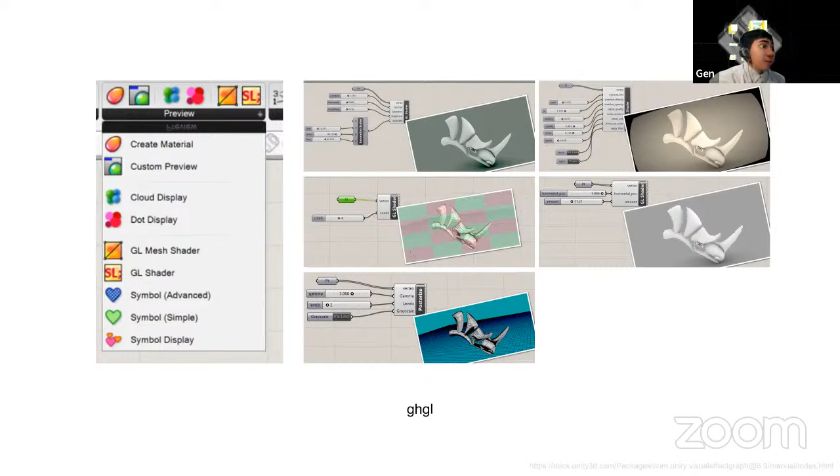You can install that via the Rhino package manager. Today we'll be mainly introducing some of the basic functionalities of GHGL and how you can use this to visualize your output from the 3D GAN.

This is one of the sample effects - you can do some cool color gradients on your NURBS or your mesh in Rhino. I think Behnavi has already posted this into the chat. You have to install these dependencies in order to make everything work.

The first one is a mesh processing library called Chromodoris. The second one is GHGL itself. GHGL can only be installed via the package manager in Rhino. That's how you can set up the environment for shaders in Rhino Grasshopper.

But before we dive into the details of the shaders - so far, does anyone have any questions regarding the existing content?

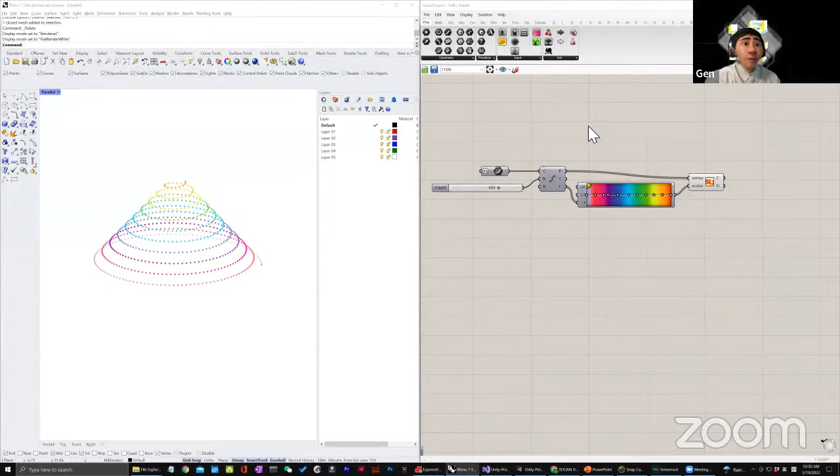After you export the OBJ, the PLY files, we are done with all this Colab part. You don't need to mess with the Colab anymore. Then we can import the PLY files from the Colab export into Grasshopper.

But before we begin to handle the point cloud part, we can take a simple look at how the Grasshopper shader language works. Can everyone see the screen share of the Rhino now? Yes, we can see Rhino.

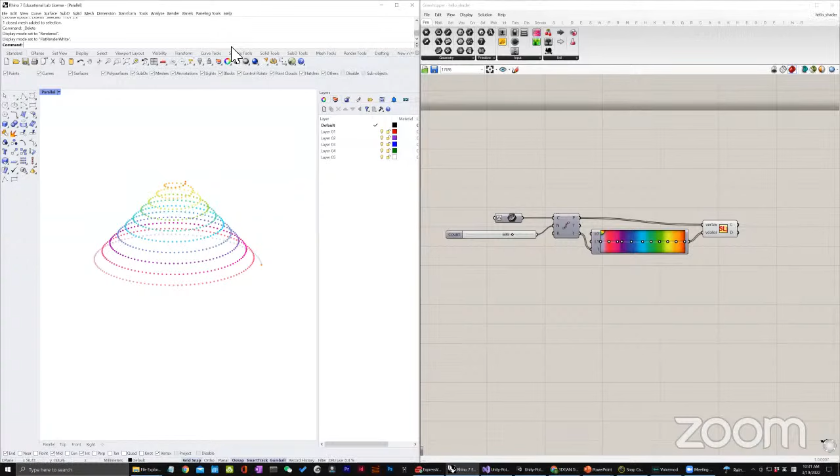So just a quick demo for how you can install GHGL. You just type into the package manager inside your Rhino command line, then type GHGL into the package manager, and it should be there. Just install the latest version. You have to restart Rhino if it's the first time installing the GHGL package.

Rhino provides some quick starter files for GHGL. I posted it here in case you want to learn more about that in the future. We'll go over some of the files together to see how that works.

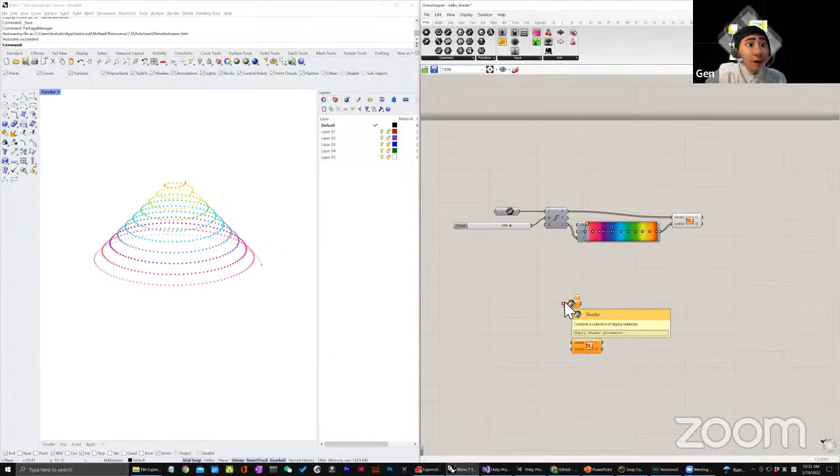Basically, what GHGL is: after you install the program, you can just type in 'shader' inside your Grasshopper command, and you'll see a couple of new elements popping up, including the shader. This is basically the shader object that Grasshopper wraps around, and also this is a GL shader, which renders the points for your Grasshopper program.

What we mainly use more is the GL mesh shader, which is actually what you use to render your mesh. Using this GL shader version, you can also use that to render some of the points in Grasshopper. For example, this one is basically subdividing a spiral curve, and it takes multiple inputs, and you can configure the input ports as much as you like.

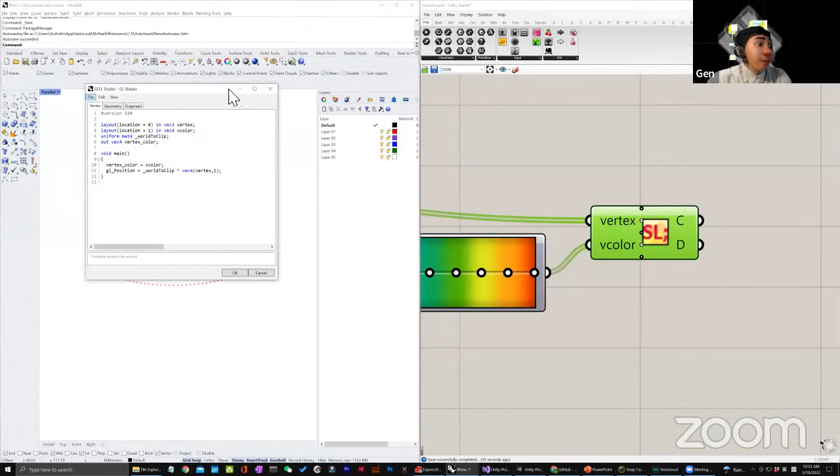So for this one, it's basically very simple. If you double click on the GL shader component, it will pop up a window, and you can see all these sub-shader programs inside the shader.

The Vertex shader is basically just projecting your vertex from the world space to the screen space. There's complicated math behind it, but basically what it does is multiply a world-to-clip MVP matrix to your vec3. Vec3 is transformed into vec4 because it's a homogeneous space - you have to be in homogeneous space to do a homogeneous transformation.

So it's basically appending a one after the vec3 of the vertex, and then multiplying by the 4x4 world-to-clip matrix. Then everything is transformed from the 3D space into the 2D, or the screen space.

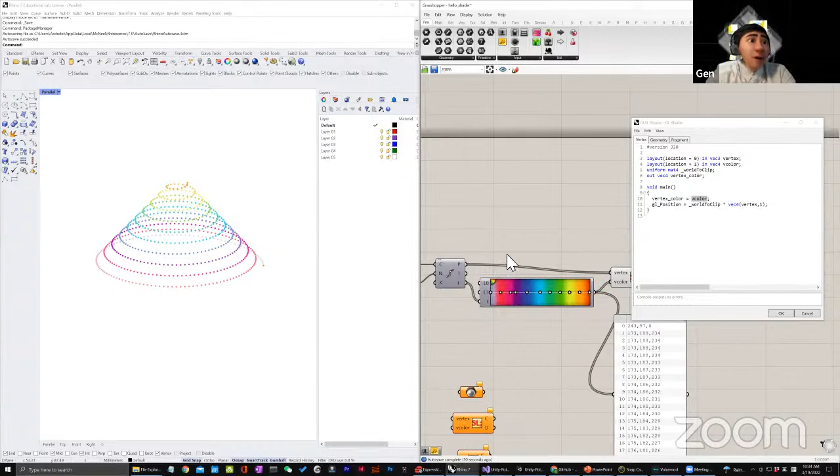Once you have that, you can use the vertex color to render whichever points are inside the screen. We are passing in a sequence - it's using the t value to sample the color from these gradient components. So for example, if you have 700 points, then we're going to also sample 700 vertex colors from these gradients. Each vertex color is passed in as what is called a uniform.

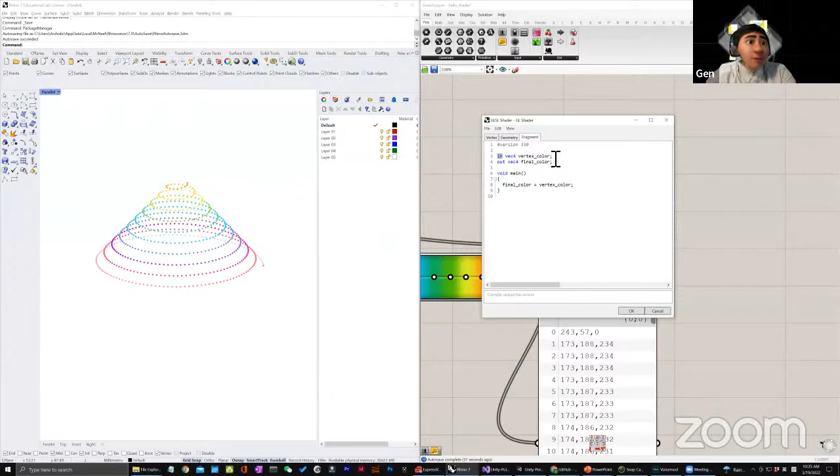As you can see here, Grasshopper uses this syntax to take in the uniform variables.

For this one, this GHGL shader is slightly different from the mesh shader, but what it does is basically the same - just rendering the points. Then we're going to move over to see some of the other examples of more complicated versions of the GL shader. Like for example, this one is still a GL shader.

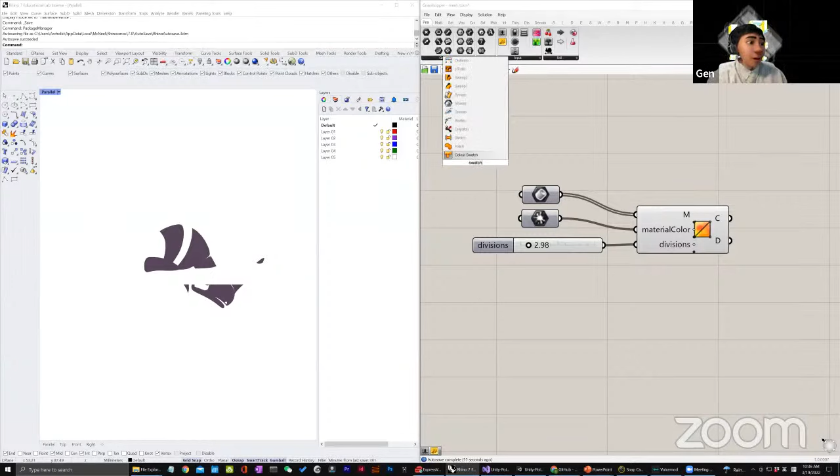This one is a mesh shader. As you can see here, we can use the swatch to give the mesh whichever color you want to pass into the mesh. For example, if you want to pass in different colors, you can select from the swatch.

This is more of a standard GL mesh shader program. So you have what is called a mesh vertex attribute, passed from the layout statement in the shader program. And you also have these uniform values which you pass in to render your mesh - for example, the material color.

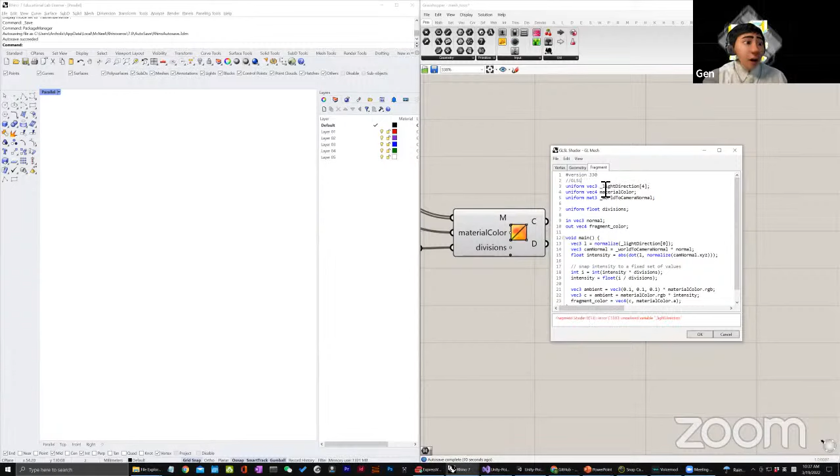All of this syntax language is called GLSL - OpenGL Shading Language. It's very similar to C if you have programmed C before. This should be the double slash for comments. This is the GLSL language that most shading programs use, and it always follows a certain pattern.

Don't be scared by this - it's usually actually very simple sometimes. It usually starts with the version declaration, which tells you which version of OpenGL you want to use. You do not need to change this in Rhino - it's mostly already defined by Rhino. It's like the minimal OpenGL version that can function correctly in Rhino.

Then here comes what we call vertex attributes. Let's look at the vertex here - vertex attributes are mostly what you pass into the vertex shader programs. So let's say, for example, this mesh vertex is actually the XYZ value of your mesh vertex, and the mesh normal is the normal vector of your mesh.

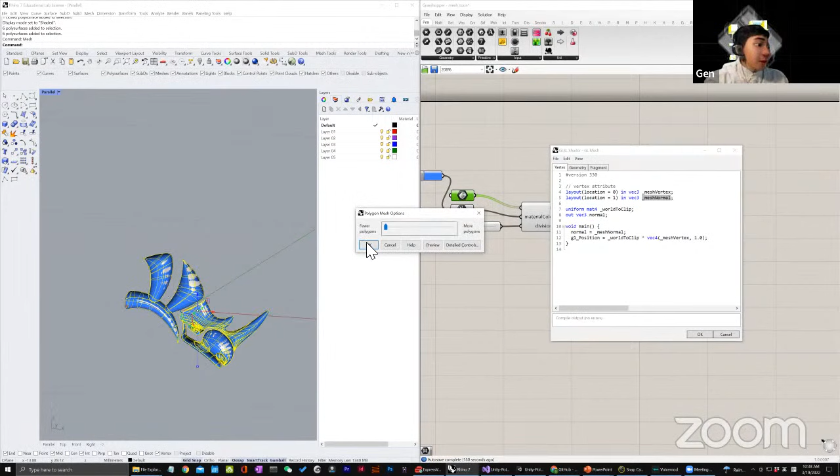If I bake this geometry, you can see this one is rendered as a NURBS, right? Here in Rhino as a NURBS. But what actually really renders it is actually mesh. So let's say we can simply transform that into a mesh by calling this mesh function.

Let me hide this NURBS geometry. You can see the NURBS is actually rendered in the format of a mesh. Each of the points is actually part of the vertex, like the mesh vertex inside this one. In this case, it's each of these particular points in your Rhino geometry, and this mesh vertex is basically the vertex XYZ value for this particular point.

And mesh normal is what is getting computed as a normal vector of the surface at this particular point. So each of your mesh faces have a normal, which is basically the vector that is perpendicular to your mesh face.

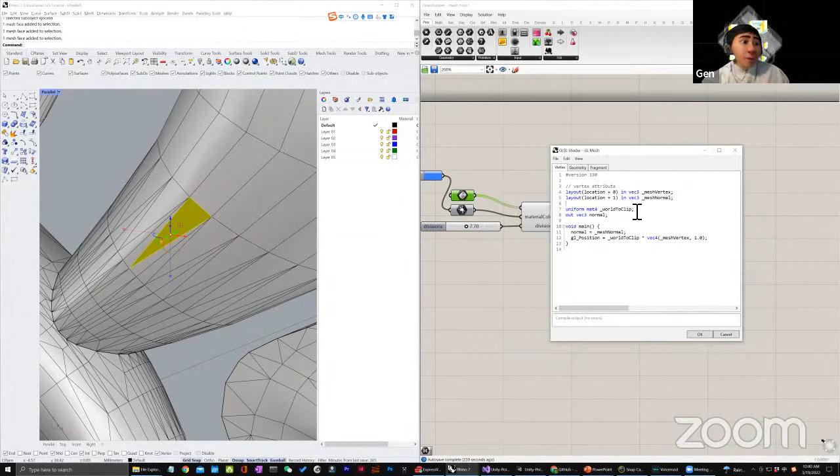With these two values, we can do a lot of fun stuff. For example, we can send the normal further to the fragment shader and play with the normal. And for the mesh vertex position attribute, we can use that, as mentioned before, to project this vector 3 into the 2D screen. Using the GL position, we can calculate...

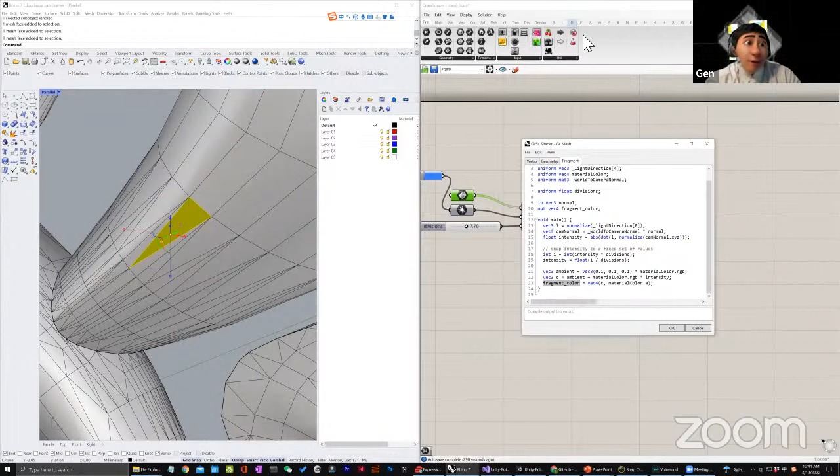the UV, sometimes if you are sampling the color from a 2D texture. But in this case, it's pretty straightforward — it's doing some intensity calculation depending on the light and camera position. Eventually, what it does is pass this, creating this vec4 for the fragment color. So fragment color is what finally tells you which color to put for each face on your screen.

We can also omit all of these parts. Let's do some experiments by omitting all these parts, and you can directly pass in the material RGB into your program. We'll comment it this way, and pass it to the arguments of the fragment color. Let's say we pass in... it actually itself is a vec4, so you do not need to worry about that.

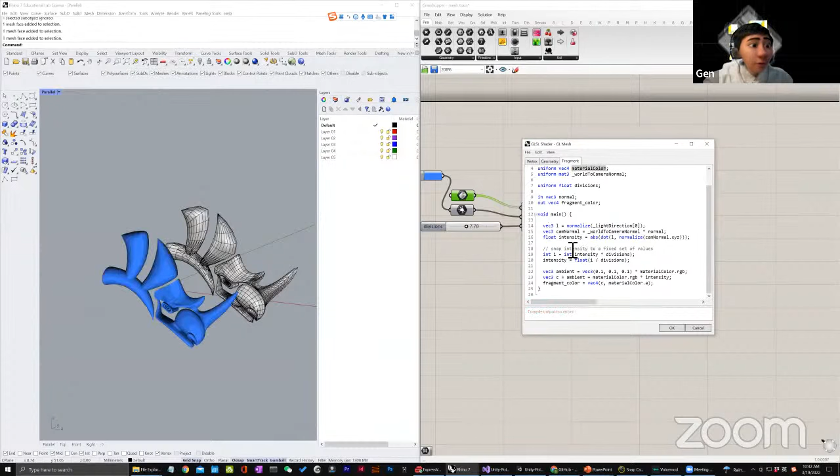I think the material color is here — we have this vec4, and we comment out all of these so we have the material color directly as our output vector.

So as you can see now, whichever color we put here will be rendered on the screen. That's the simplest fragment shader you can create — it's basically giving your mesh a certain color based on your input. And the color here in Rhino is represented as a 4 vector, vec4, meaning a four-part vector that represents an RGBA channel of your color.

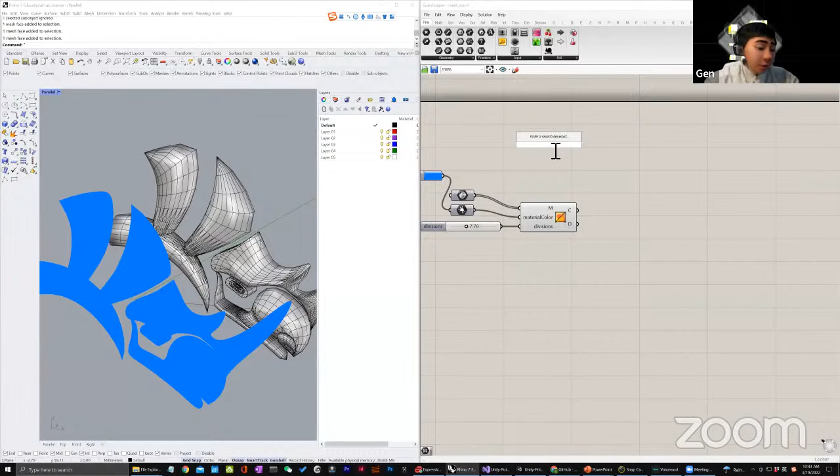So let's say, for example, the color is 0, 120, 225, and 225. The vec4 is basically the same as a vec4 color composed of your RGBA value. That's the very fundamental concept of the first Rhino GHGL shader program that you can write.

A quick note is that everything that happens inside the shader is inside the main function. It's the same in the vertex and fragment shader — whichever code you put, it's going to finally be rendered inside the main function.

The uniform is what we pass in here on this interface as some of the external variables. There are also some built-in uniforms that you can get from Rhino, for example the light direction, and the world-to-camera normal which is basically used to calculate bump maps. You can find all of these built-in uniforms from here. Also, frame size is the width and height of your current screen.

The built-in attributes are what you pass in as the vertex attributes from your Rhino program. Rhino only gives us four attributes, and the mesh vertex is the position of your mesh, which will be used most. Mesh normal is the normal vector of your mesh face. Texture coordinates is what we call UV, used to sample from a 2D image. And mesh vertex color is the built-in vertex color for your mesh from Rhino — if you draw your mesh with some color in Rhino, you can access the vertex color from here.

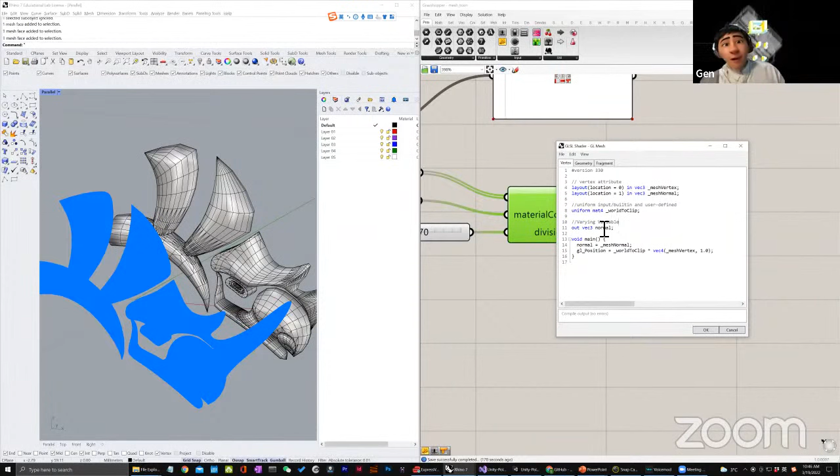This is usually called a varying variable in the GLSL shading language. You can understand that you can pass in something from vertex attributes to fragment attributes, for example, the mesh normal that we usually use.

And we can take a further look at the original example. It's nothing special, but taking the light direction and the camera position to make your rendering more fidelity, higher fidelity. Okay, so that's the mesh normal example provided by Rhino.

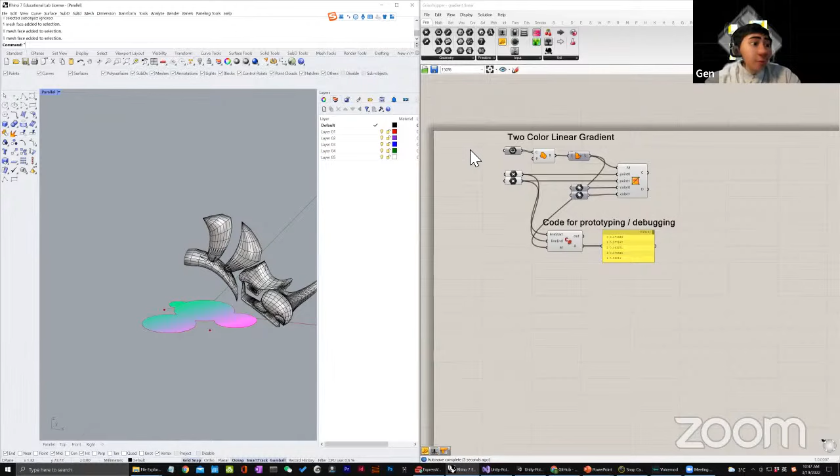Based on that, we can probably have some more fun stuff to play around with. For example, this one. I think instead of using the existing example, we can also customize our own meshes.

Yep, here's another point. This example basically shows you the example of gradients. So that shows you how powerful our shader is, that allows you to do a lot of interesting visualizations.

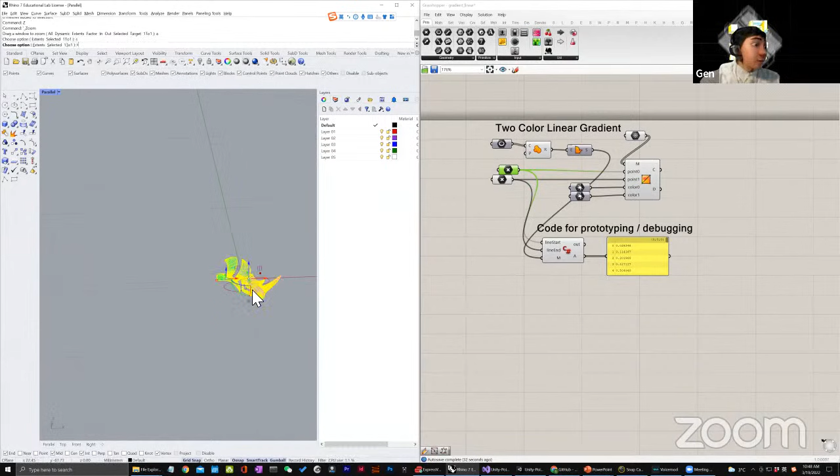For example, what if I want to render our mesh based on the vertex proximity to some 3D point in the Rhino workspace? This is how you do that, and you can see this changing in real time.

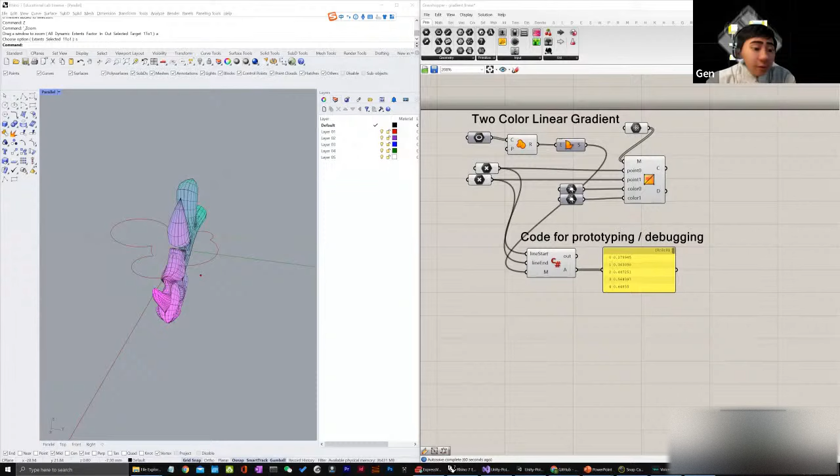So first of all, if you recall from the previous one, we didn't have the uniforms that you can customize on your shader program, like point 0, point 1, color 0, color 1, especially what you use for the shader program. You can pass in all those points and colors from the uniforms.

Like if you want 2 points as the point you want to determine which vertex should be rendered, this is where you're passing the 2 points as the uniform in the form of a vector3. And you can also pass in the color for each of the points that each vertex is closest to, in the form of a vector4.

And in this case, we can compute a value for each of the vertices, like their distance to the points. This is computed by basically creating a line between these 2 points and projecting this vertex onto the straight line. Depending on the parameter between the 2 points, it will give a value between 0 and 1 to determine which color this vertex should be rendered.

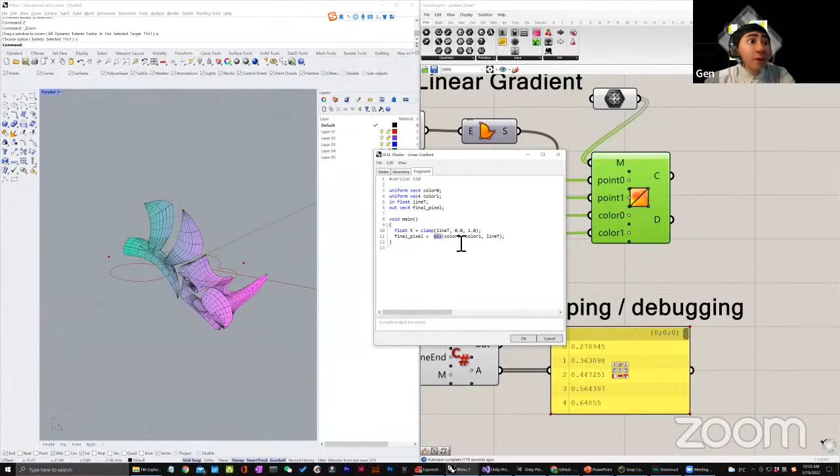So basically we pass a float called 'lineT' to the fragment shader to determine the color that we want to render for each vertex. Here we use a mix function to mix between 2 different colors in this GLSL program.

I think there was a question: if we make the mesh a bit higher resolution, does it affect things, and how do you go about the code? Does it compute within the same time?

You mean like a high resolution mesh? Yeah, so if you increase the resolution of this current mesh, is it a better result? How does it affect the result?

I think the resolution of the mesh shouldn't impact the result so much. It's basically what is processed on your GPU, so it's pretty efficient if you're asking about this in terms of performance.

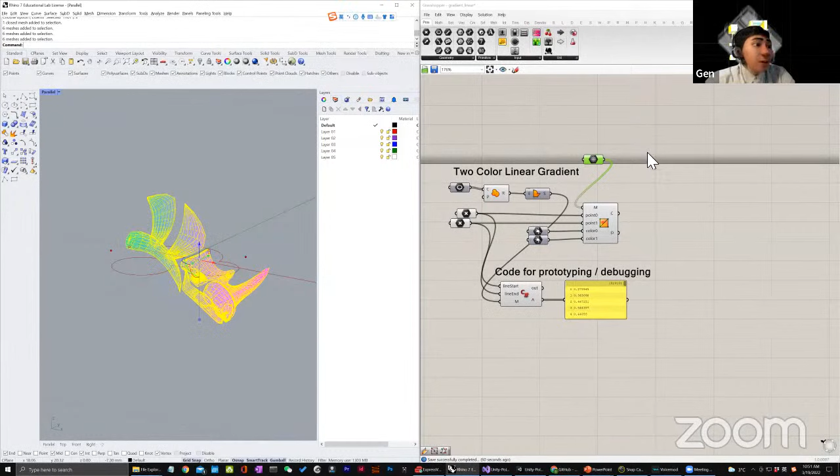Yeah, you can actually subdivide your mesh using some tools. I'm not sure whether I have installed Weaverbird here, but I think I have the Weaverbird subdivide. Haven't used this for a long time, but you can use the subdivide function in Weaverbird to test. If you further subdivide the mesh, it should be fine as well.

Okay, so now let's create a new document and we can start experimenting with rendering our 3D scanned objects using this GLSL shading language. We're gonna start from a simple Python script to customize our file import. Yeah, this should be very intuitive.

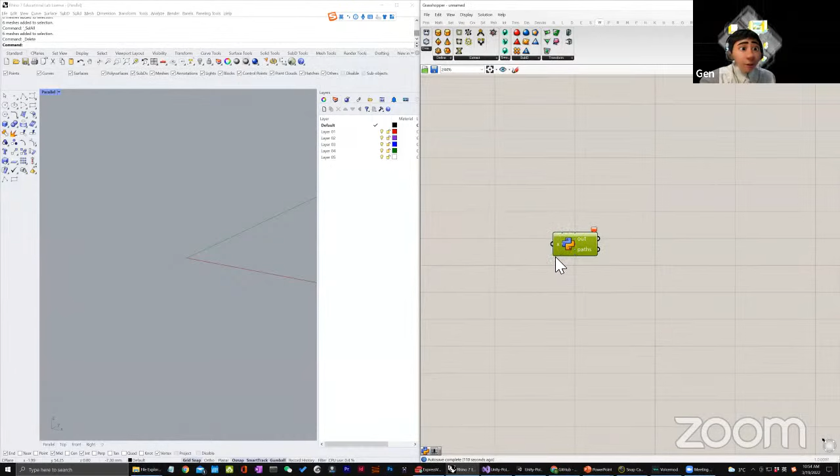We can change this variable name to path, and we keep that type hint of string. Now we do not yet have a path here, there's nothing here, but this path is basically where you store your 3D objects.

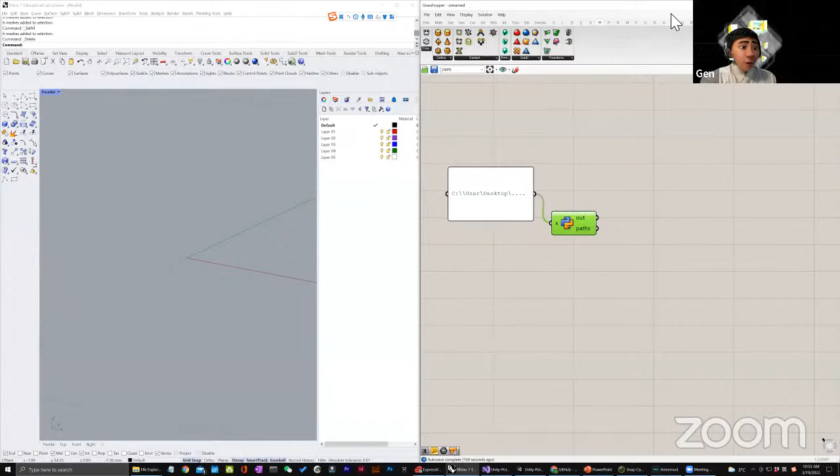So let's say, for example, if I store that onto somewhere like C, some user's desktop or stuff like that, then you just use the panel to add this repository here, and you can run this pretty fast. I'll be typing my file locally. You can do that by copying and pasting this directory from your file explorer.

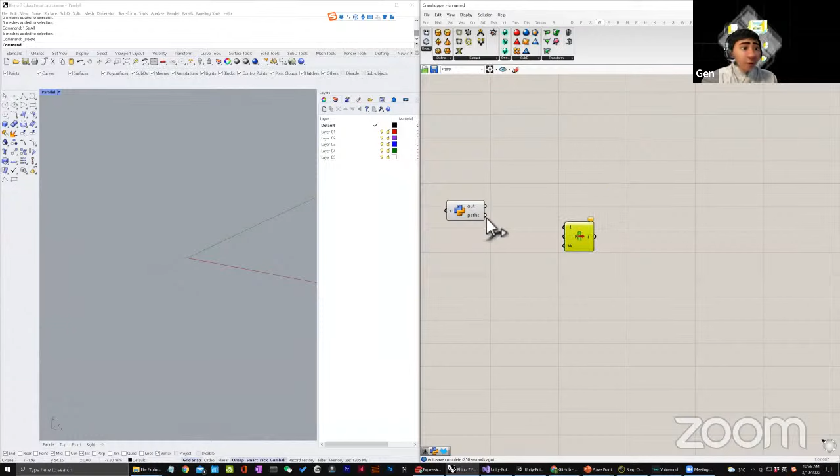Then we'll be reading some of the files using the list items. We're gonna retrieve them by using a number, for example, retrieve the 20th element of that, and then we're gonna create another C# script to read the ASCII file that we downloaded from Colab.

As you can see here, our PLY file is nothing special, just simple text. This is one of the PLY files that I got from my 3D GAN generation. The ASCII format PLY file, if you open it with a code editor such as VS Code or Visual Studio, you're gonna see all this kind of stuff.

It begins with PLY and format ASCII, and you're also gonna have a count of how many vertices you have for your PLY file. Since I can only have XYZ values, it will show property float X, float Y, float Z. That's basically the header part of your PLY file. What we do with our C# script is basically parse all these XYZ values from the PLY file, and then transform that into 3D points.

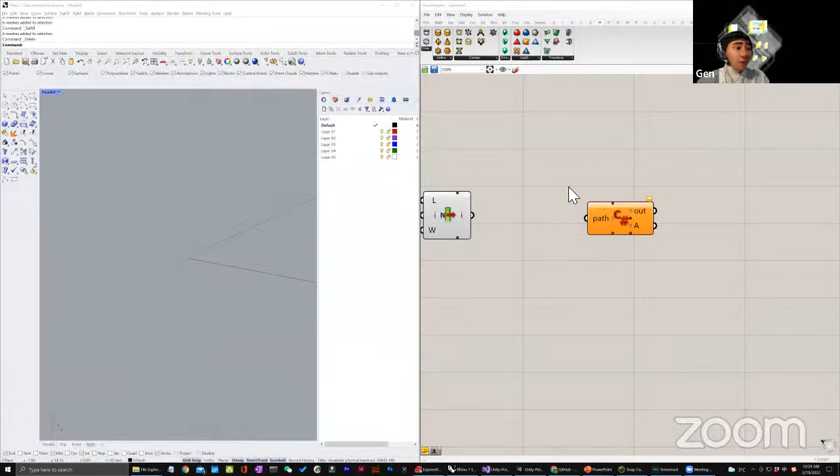Let's go back to the Rhino part. Once you have the path, you can read that from the C# script, and you can parse that into 3D points. So we're gonna just leave it called A.

We're gonna use system.io to read all the files, using system.io.stream reader to read from the file. This is not existing in the default API. This is how you create a stream reader using the C# system file built-in class. Okay, it's running correctly.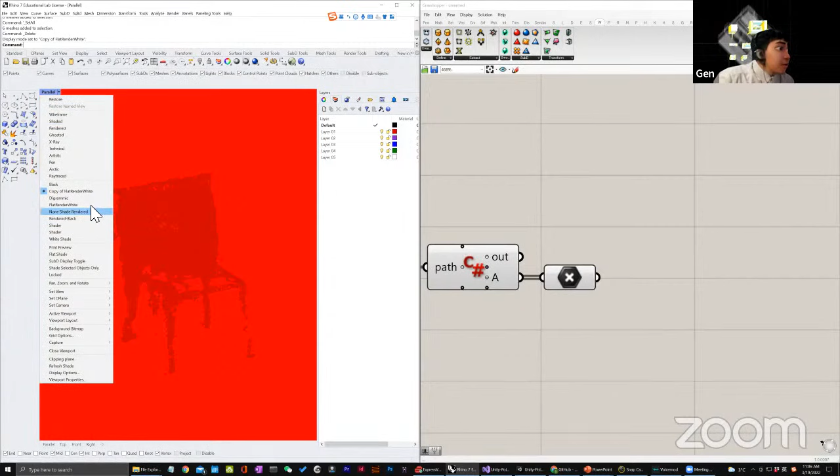All right, let's see how that looks in the white background render mode. Nothing, okay. Yeah, you can also do some fun stuff here by assigning random color using the point visualization as well. But we're not going to do that because we're going to mainly focus on how we interpolate it into a mesh.

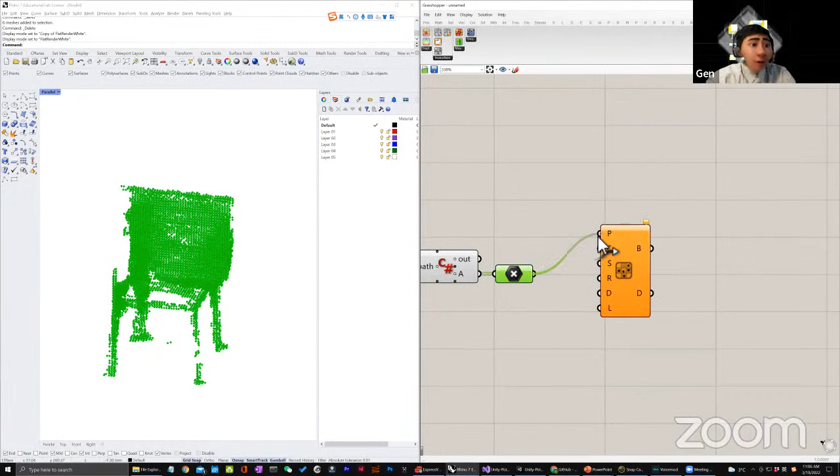So here is where we're going to use the Chromodoris library. Now as you can see, it's basically a bunch of points, right? How are you going to turn that into a mesh? We're going to use this magical component inside Chromodoris called build ISO surface.

Yep, so sorry. We're gonna build voxel samples from these tiny points that we have already got. You have to input the voxel size, I think, and also the effective range, which is the required argument. This one is just heuristic, I used 10 to 15 something. Basically it generates a voxel box for your input points.

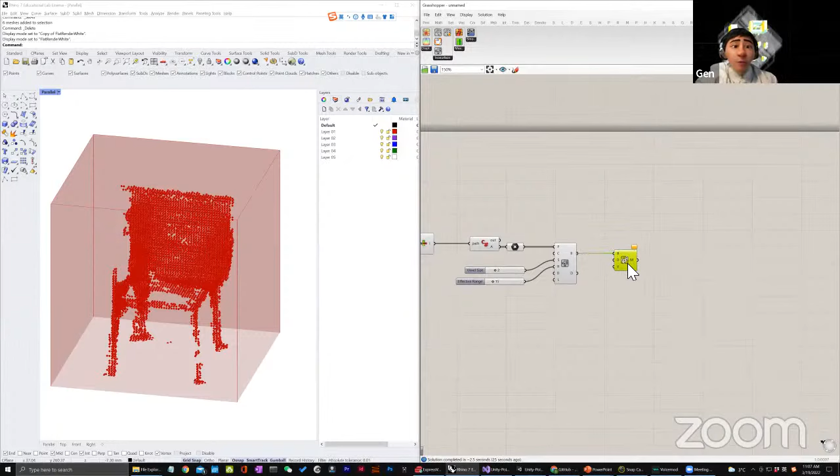And what's actually doing the magic here is this one. It's sampling the ISO surface. It calculates the ISO surface from the voxel data XYZ and a box. You can understand that as sort of like a marching cube algorithm that computes the mesh value for your given point inputs.

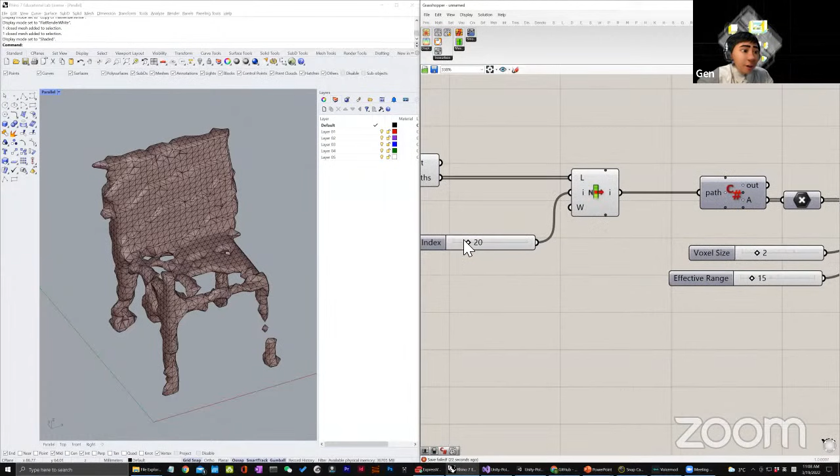Great, now that we have a mesh here. See what we got? Yep, you have a mesh that is composed of all triangles. And then we're gonna, if you change the index here... oops, I'll be careful about this one, it's kind of expensive I think.

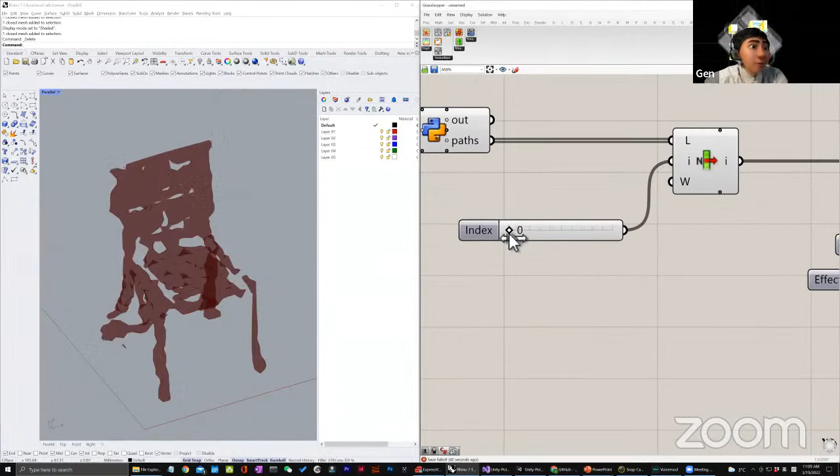Yeah, then you can see that the mesh is changing smoothly as you slide through different values. This is basically what we call a 3D latent model in real time, right? You slide the sliders and you get different mesh shapes here.

And now we're going to further do some visualization of our mesh objects. So one simple quick technique we can use is to create a bounding box for this one and rotate the mesh around some certain angles. I'm going to rotate that with respect to the bounding box, to the center.

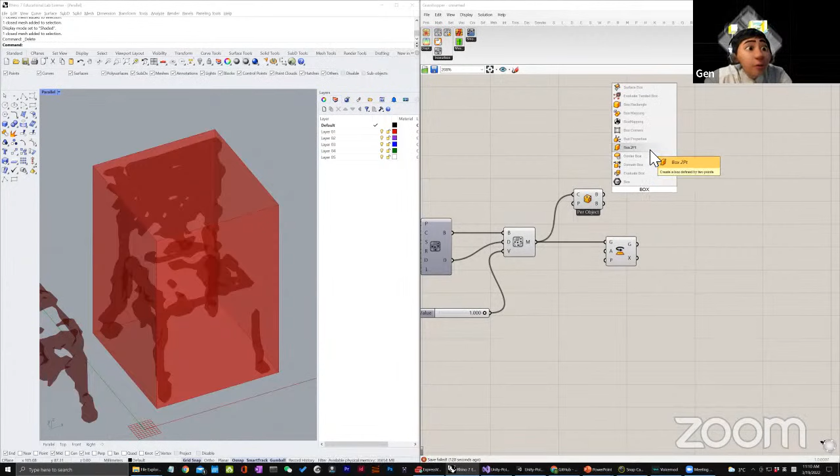I think it should be the box property instead. Here we go. I'm gonna rotate that around the center of the bounding box by giving it a rotate angle of 1 radians, because this one takes in radians. Okay, we're gonna... from the rest of them. Then you can have a rotating chair here in Grasshopper.

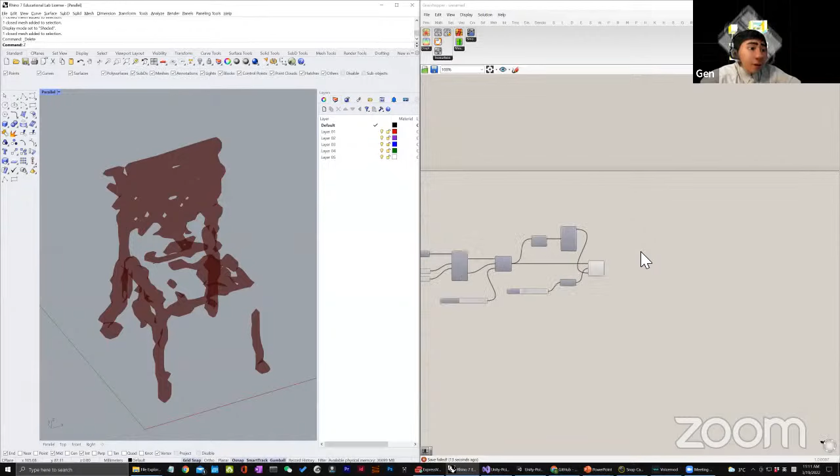Okay, yeah, this is just a very simple visualization. And then we're gonna do some real stuff. We're gonna write a GL mesh shader program for a mesh. But now you can see that there's actually nothing on the screen because the default mesh shader doesn't really have anything.

It's basically giving a random diffuse color, in this case 10011. Yeah, I think we can slightly play with this. It's very dark, right? Like we can slightly play with this one to further some visualization.

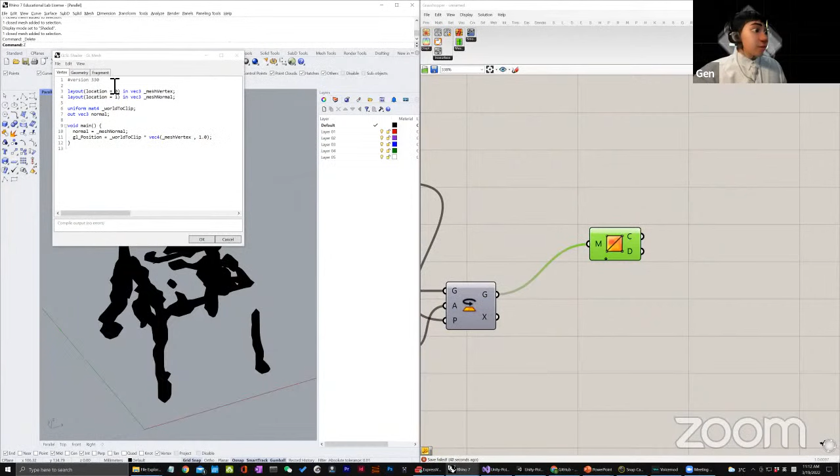Yeah, let's first forget about all these options. Now we have a purely white chair.

Well, the most basic stuff you can do here is pass some simple color for your mesh. Use a swatch. And you have to add these as a uniform. Then you do not need to hardcode the diffuse, you can just say let's say diffuse then equals to color.

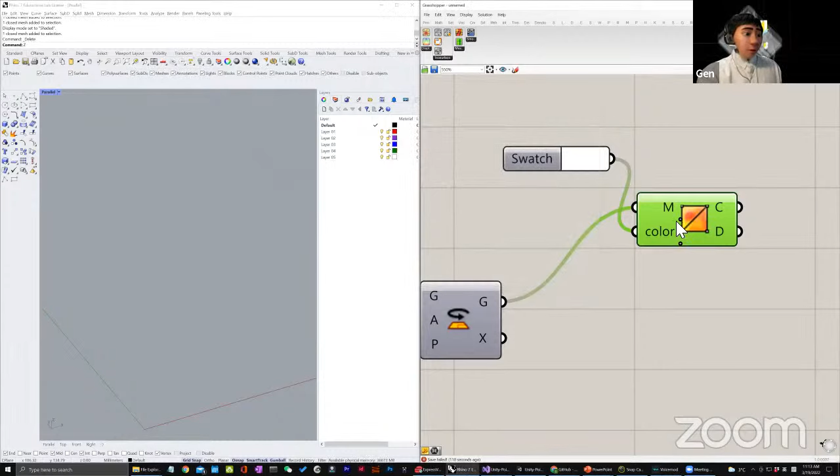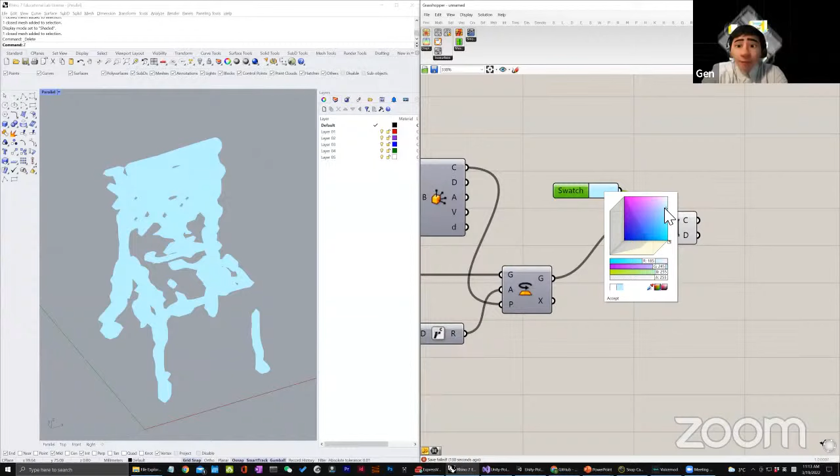Yep, then we got something. Arrow. Have this red for color. Oh. Okay, now we have the color mesh here. Just one second.

What we can also do here is add some texture to our mesh instead of just the raw color. To do this, we need to copy our Python script to read from our image folder.

Let's say, for example, what I have here is some images I generated from the neural network. Basically, it's just a random cloud. I'm gonna use these images as my texture for the mesh.

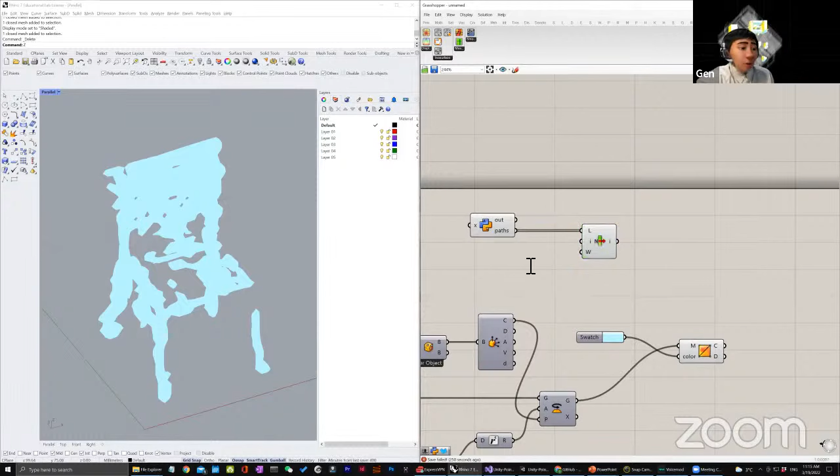Like we can use a simple index that has an image and perform some visualization. For example, this one should be different if you change the index.

And we're gonna use this image object as sort of like the input for our mesh. How are we gonna do that? As we previously talked about, mesh vertex attributes - we can use another attribute called UV.

It's one of the built-in attributes, and it's called mesh texture coordinates. We can just call it UV, and we're gonna pass it from our vertex attribute to our vertex shader to our fragment shader. Let's call it UV, and now UV should be the same value as the mesh texture coordinates.

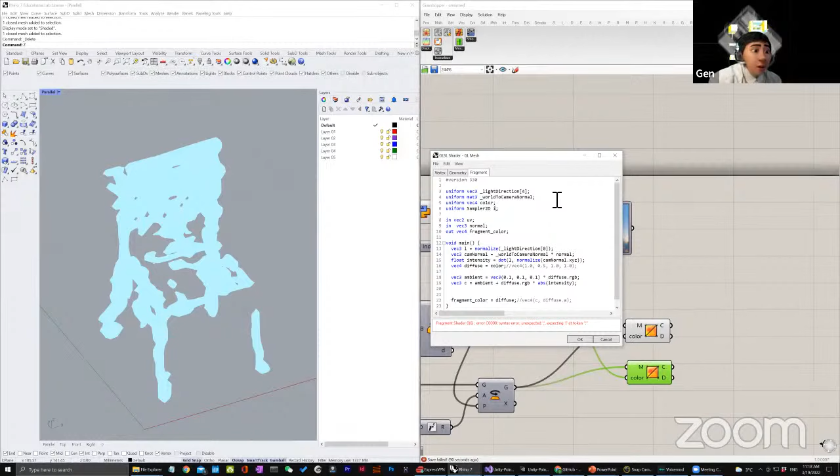I'm gonna add another uniform called texture, otherwise it's gonna be yellow. Now you pass in the texture to here.

See, this one shouldn't be named texture, I think - or sorry, I named it incorrectly. It should be smaller, as that's sampler2D.

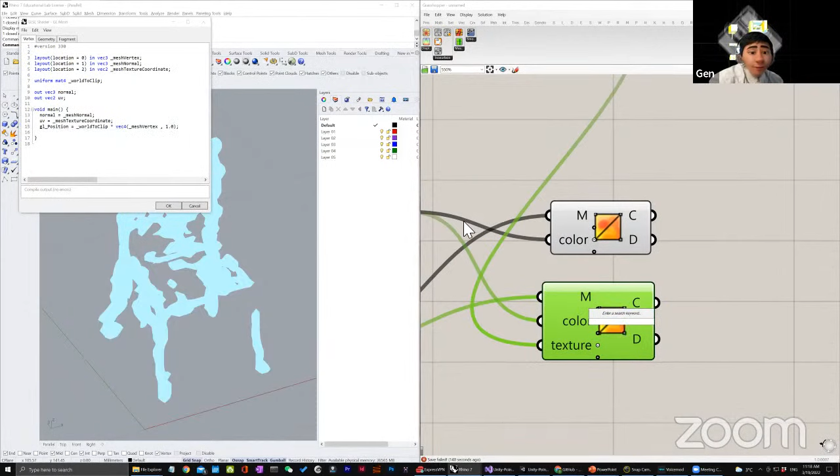Okay, now it's good. But now we still haven't passed that into the fragment shader - sorry, passed into the mesh color. How we're gonna do that is actually quite simple: we use this function called texture2D in GLSL.

So color equals texture2D. The first argument will be your sampler texture - let's give it a different name. I think 'texture' is one of the built-in variables that you cannot name it after, so we name it 't_texture'. Then we have UV, and we're gonna replace our diffuse with the texColor variable.

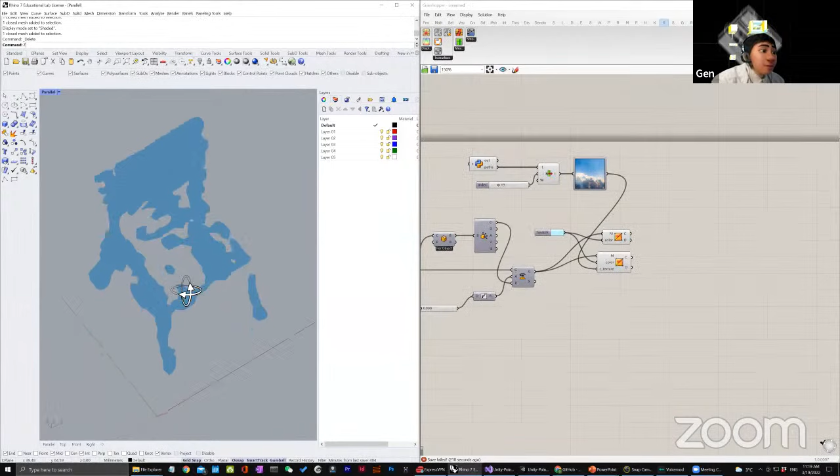Interesting. I think I have to recompute as well. Okay, it doesn't seem to sample the images correctly - the image color correctly from the mesh. I think this could be some bug in Rhino.

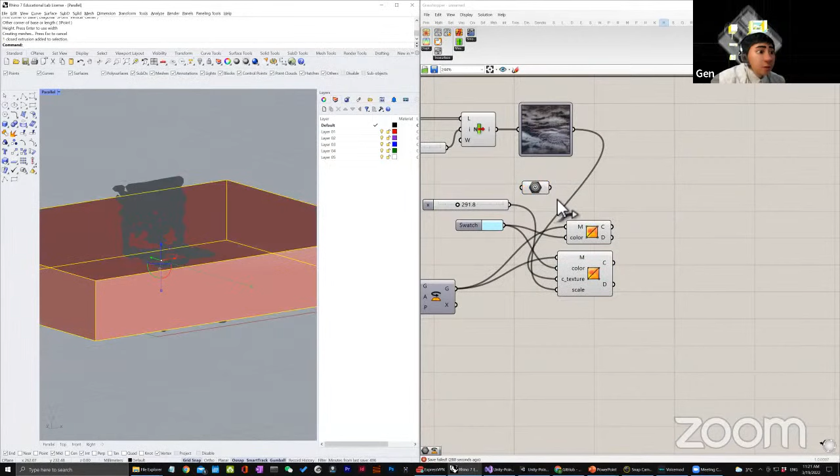I think this is not rendered correctly because of some probably internal bugs of Rhino. Like, for example, if we render another geometry, like NURBS - oops - yep, so then you can see it's rendering correctly, right? Perfectly clean. Yeah, I'm not sure, but this is probably something that Rhino will have to fix.

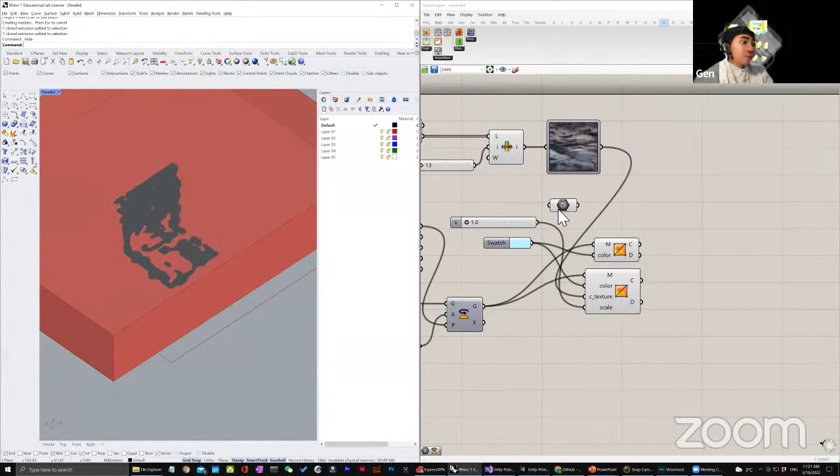But this is actually how you sample texture and apply that to a mesh in Grasshopper. Although the texture mapping doesn't really work well, we can use another workaround here - instead of using that as texture mapping, we can probably use that as shading instead.

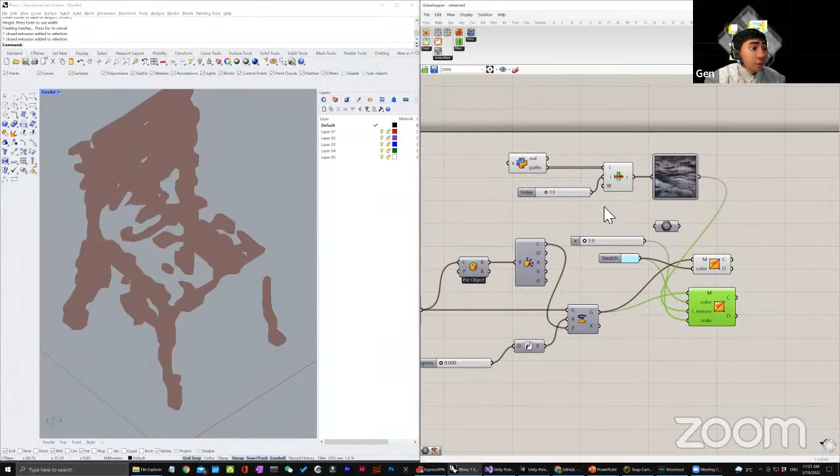Let's recompute. Probably need to scale this one a little bit. So it looks like...

Just give me a second. I'm gonna look into this. I kind of forgot about how this normal is done because it's kind of a long time ago. Let me try to figure it out.

I think some of the APIs might have changed here. I think I need to play with the variable a little bit.

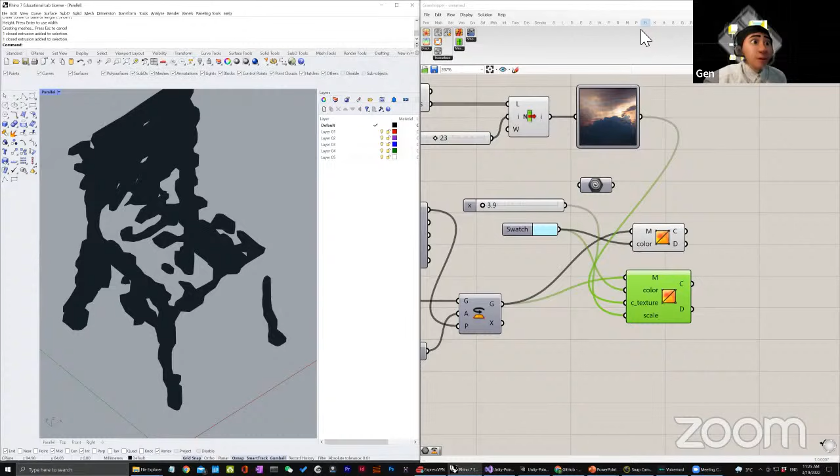Oh, I see, it should be a problem with that. Yeah, this is a problem with the... I think with the chromodoris, probably, because the mesh that is generated is probably not usable for rendering. So we might need to reconstruct the mesh a little bit so that it can render properly.

Double check. Yeah, that's right. I think this is kind of like their issue with chromodoris. It's basically rebuilding the mesh UV. I think maybe we can save this by another approach, maybe by using unify mesh UV.

Maybe, yeah. Mesh normals. Is it working? No. Oh yeah, it's working, yeah.

So I think the reason why this is not working is that after the chromodoris reconstruction, some of the mesh normals are kind of flipped. So you have some mesh going into the screen and some mesh normals going out to the screen, but they are connected to each other. If you unify the mesh normals, then they should all point either inside the screen or outside the screen so it can render correctly.

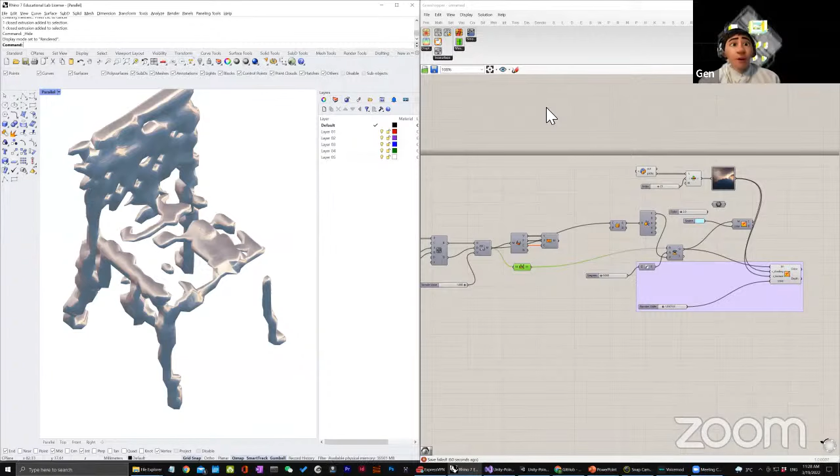But I still don't think the texture sampling works correctly because that seems to be a bug that's been here for a while.

Let's try another approach. Let's try this texture-on as well, see if that works. Yeah, I don't think the texture-on works well. Okay, but somehow you get the texture as a kind of shading gradient for the mesh.

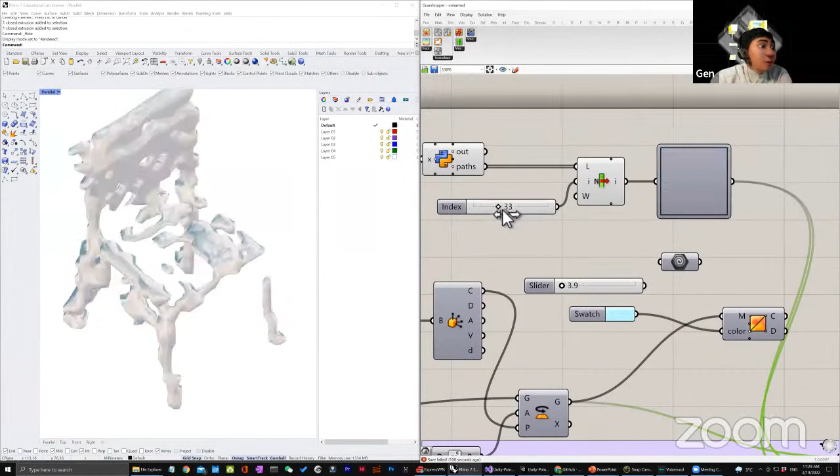Although the UV is not working correctly in Rhino or in chromodoris, there has to be some debugging for that section as well. But I think it's on a very low level of Rhino that caused the problem.

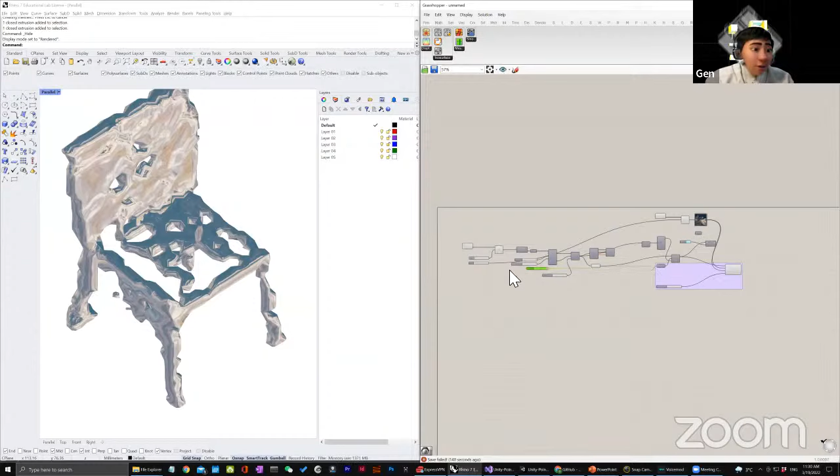So now you can see with this visualization, we have three different sliders that we can already play with to create tons of very complicated effects already, right? You can control the rotation of your chair, you can also control which index map you want to use, and also which 3D geometry you want to use.

So by tuning these three sliders, you already have a lot of interesting effects going on here. A small trick for doing the interpolation together is that, for example, one way you can use the same controller for the geometry and the map so that they change at the same time.

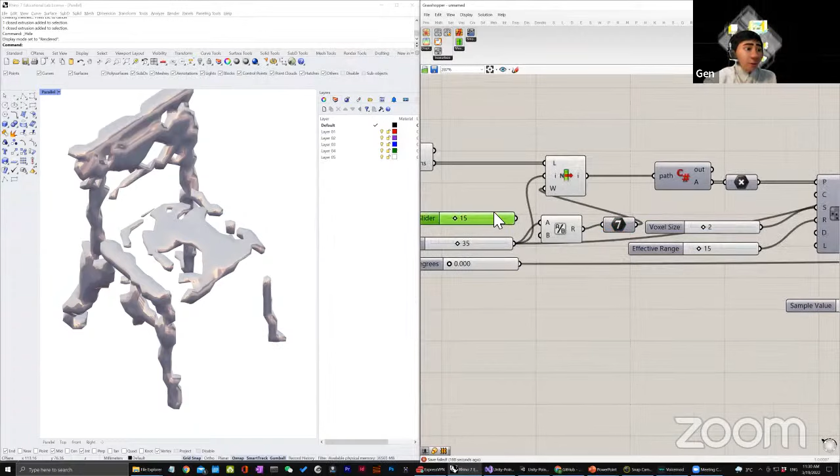Or you can set one of them to be divided by 2, so that, for example, if you don't want the mesh to change so much, you can say if you want to change your mesh every 2 steps, then you can use this trick to let your mesh change slower than your texture shading. You can even make it slower by dividing that by 10, so that every 10 textures you get a new mesh.

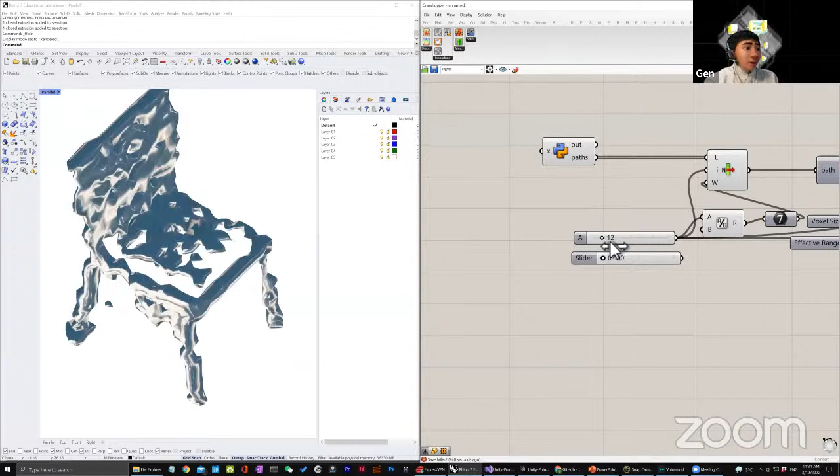For example, these are the same mesh but different texture, but then you can get a different mesh and different texture. You can also use this one to slightly tune the degree of the rotation. So by playing with all of these, you can use the wrangle slider tricks to generate some really interesting GIFs out of your projects.

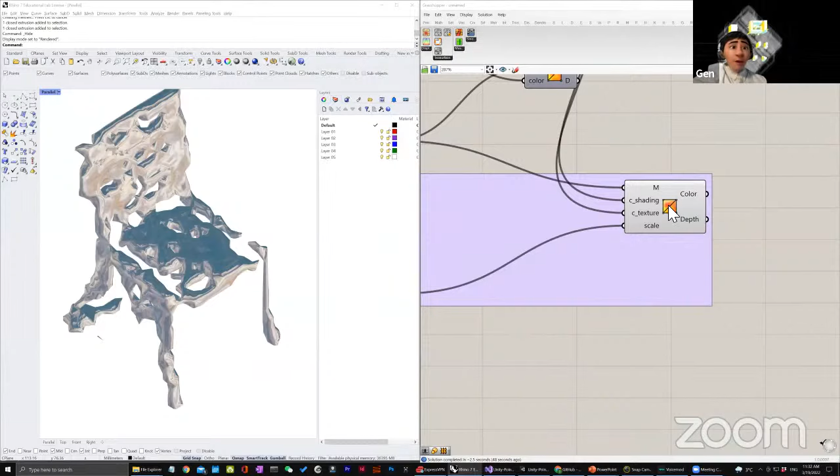A smaller step forward to take a look at how the shader can be used across time. One thing the shader is really good at is performing real-time visualizations. By real-time, we mean you can visualize the change in your shaders across time. One of the built-in uniforms for GLSL is called time, which is basically the time in your system.

For example, I want my GL position dot x to have an offset that equals the sine of time, and I want this offset to be added to the x of my mesh vertex. We can say this like... basically, maybe it's too small, let's say we can multiply that by 10. Okay, and show that. I'll write that in that way.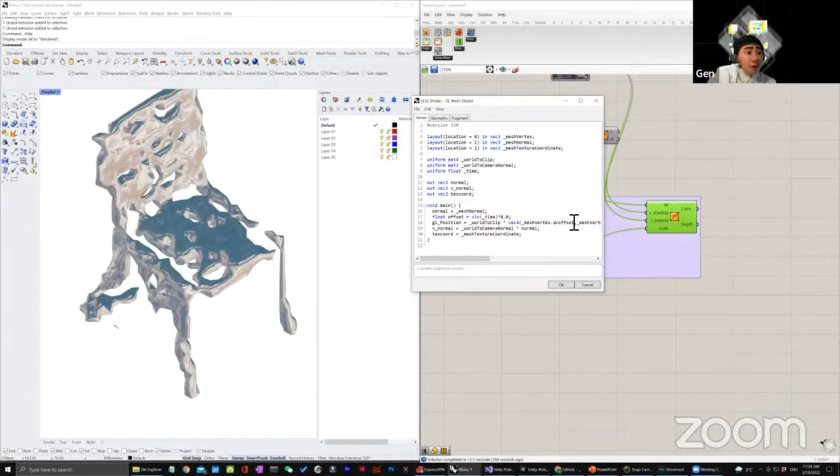I think... oh, sorry. I shouldn't have directly modified this one because it's somehow... oops. Sorry, this is sad news. This is one of the bugs of this program: if you click mistakenly into somewhere, you will probably delete the entire program. Sorry, let me just redo that. This is... let me save my code somewhere else.

Interestingly, yeah. Now that we have recovered the vertex shader, wait, the fragment shader also gets deleted. Huh. Yeah, let me recap the fragment shader as well. Recompute. Okay, now we have everything back. Sadly we have to redo everything, but we can first visualize how that works.

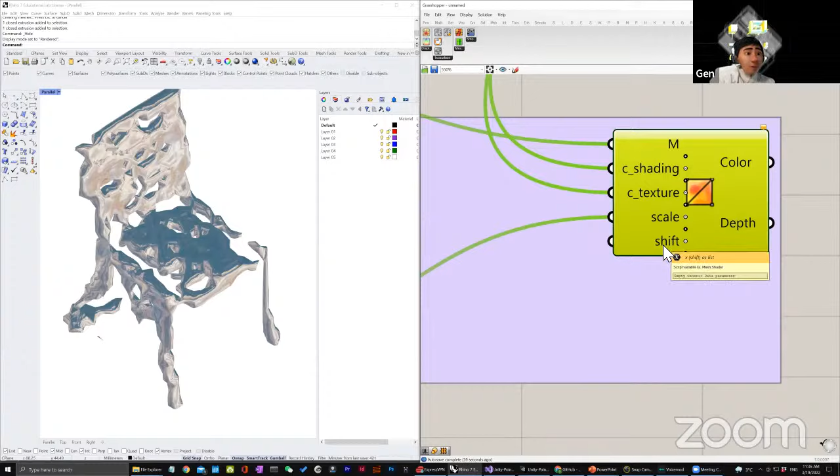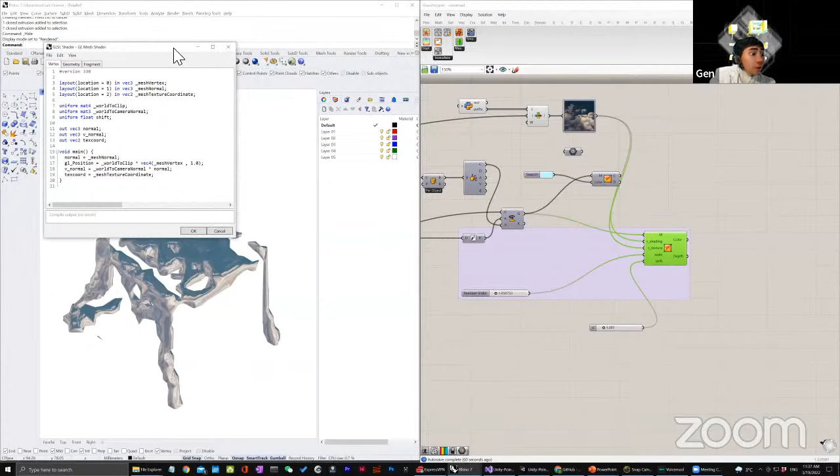Like how you can use time to change some of the color of your vertex, say we place a shift on this one. Say whether we can add that. Okay, this is still vec4. Maybe if we can add a shift to the entire... okay. Yes, seems that we can, right? This is basically adding the XYZ value to the GL position.

We can also add only to the X of this object. Okay. We can create an offset equals to variable time plus shift. Just directly get a built-in variable from here: time. Okay.

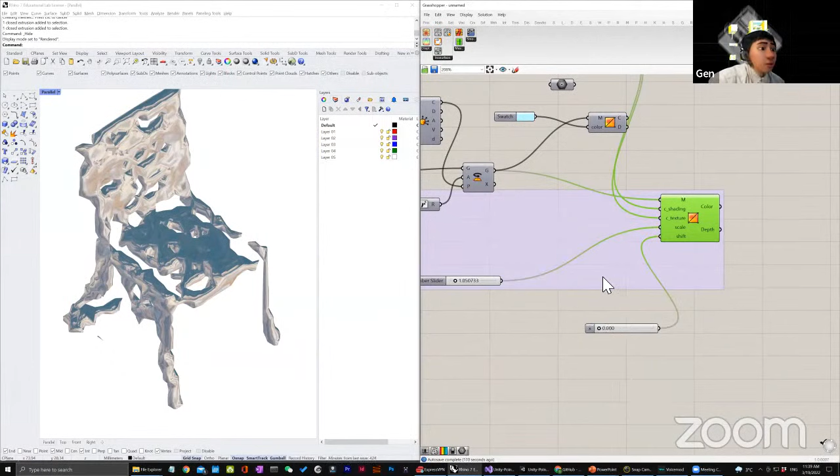I'm going to use offset instead here. Compute. Yeah, now as you can see here, as time goes, we can see the chair is slowly moving in our X direction. We can also, instead of just using time, give it a sine function and multiply that by something so that your chair swings back and forth between two points in the space.

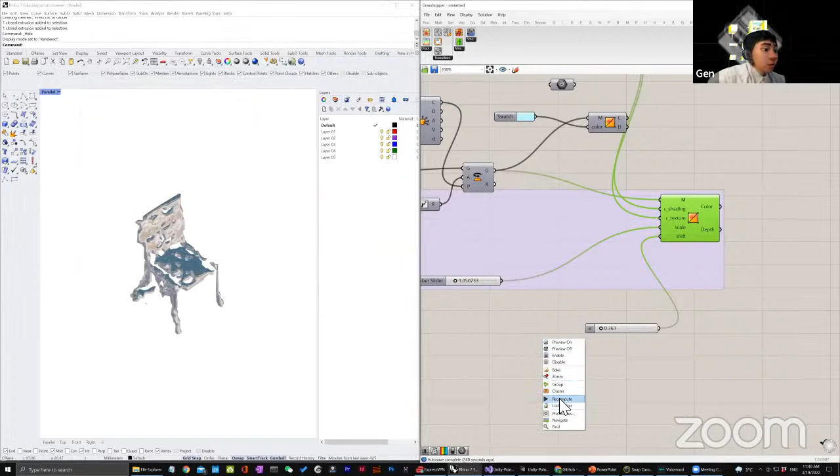Apart from manipulating the offsets of your points, you can also manipulate apart from the GL position - not sure whether we can manipulate the mesh vertex here. Not sure if that's possible. Yeah, it seems that the mesh vertex is not writable. It's probably that Rhino does not allow you to manipulate the vertex XYZ in real time.

So yeah, but it doesn't matter, we can add something else to the effects. For example, we can add some shifts in the texture coordinates. The texcoord here is actually the one we used as UV before - call it UV instead. This should be UV 0,0. We can let uv.x equal to offset.

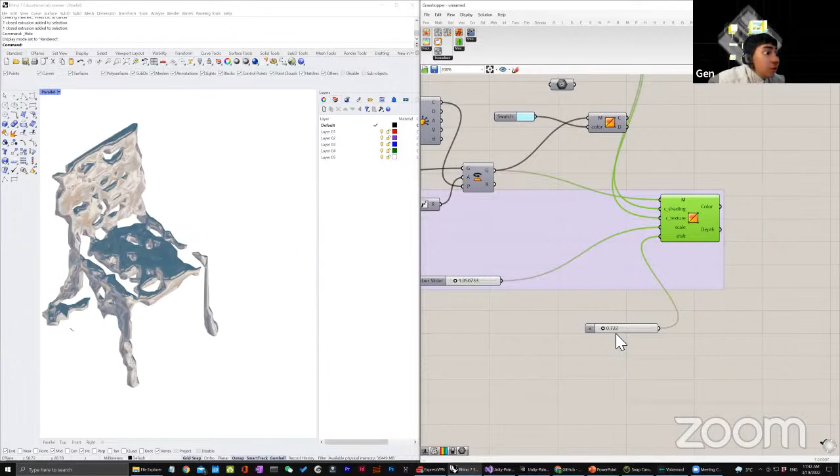Oh sorry, increment by offset. Compute everything. Oops. Interesting. Probably this is just too small, you can maybe need to do this instead. Yeah, maybe this has to be done in fragment shader instead.

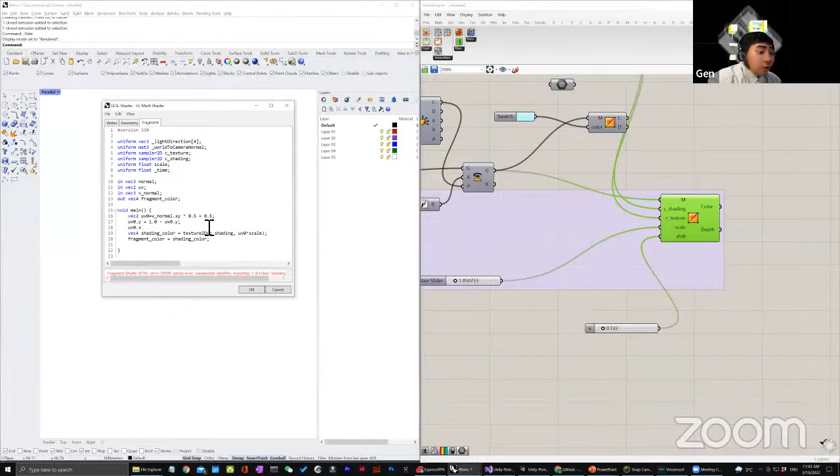Sorry, let me check. See if that's the - if we want the texture to simply float around across time, let's try to do that in fragment shader. Yeah, okay, interesting. Seems that this can only be doable in the fragment shader.

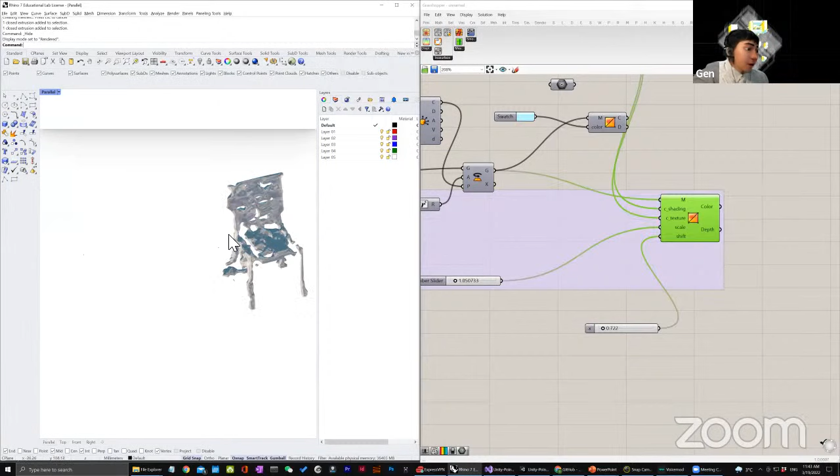So now you have the texture, now you have your 3D mesh moving back and forth somewhere in the space, and you also have the texture that seems like a fluid or floating effect inside your mesh. You can also use, instead of the timer or system time, this slider trick to control the shapes of the texture on your mesh as well. You can see this is real time, right? It's pretty fast, so if you want to record some really quick demo, you can use this one.

So that's pretty much all we're gonna cover in the Grasshopper shaders. Does anyone have any questions so far?

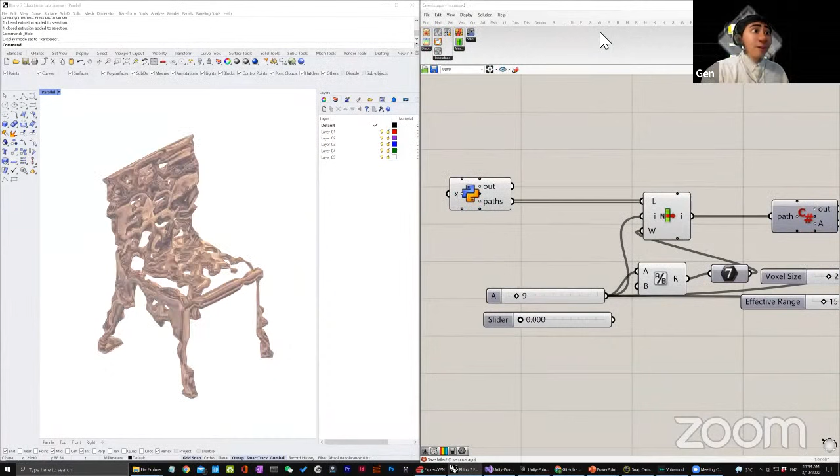Did you check the question? Good question, I am actually not sure. I don't think the texture can be exported, because the shader is in charge of the rendering of the mesh, it's not actually generating a texture.

So if you really want to texturize the mesh, I think you need to manually create the material somewhere in Vray or other renderers. This is basically the same as trying to implement the renderer using the shaders.

But does the Grasshopper rendering help, like Grasshopper V-Ray helps? No, this is a different system. This is the Grasshopper built-in renderer. It helps you display what is on the Grasshopper canvas to the Rhino viewport. But it's essentially different from the Vray renderer.

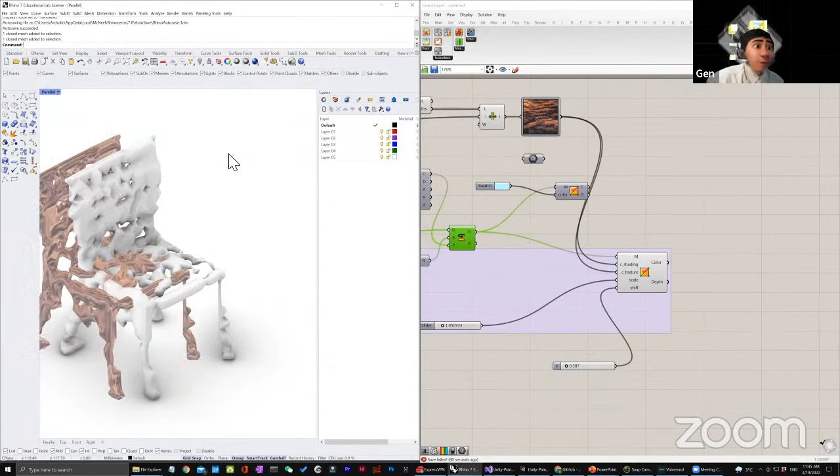This is essentially what we had in one of the example videos, like you can have this floating texture inside Grasshopper. Does anyone have other questions? If not, then we're gonna jump into Unity for the remainder of today's session. No more questions? Okay, we can start with the next part.

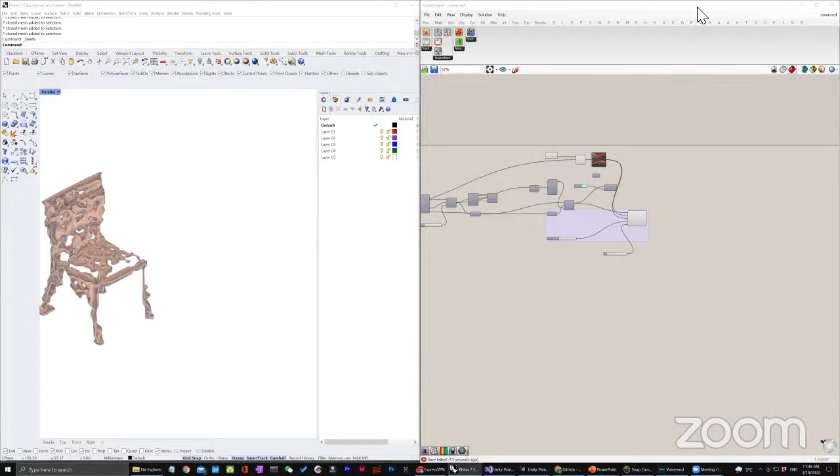Nice, let me switch back to the PowerPoint really quick. Now we have done this very long session of live coding.

And we also can do some animations with this setup. Basically you use the slider animator to export the sequence of images, and you can create a GIF out of it. And you can further convert the GIF into an MOV or other files that you want.

So this is already some very mature workflow, I think. But Grasshopper is still not, in terms of visual effects, the expert in the domain. You have a very good geometry kernel, but the shader is what Grasshopper is not good at. But GHGL is a good tool for starting to learn shaders and all these visual effects.

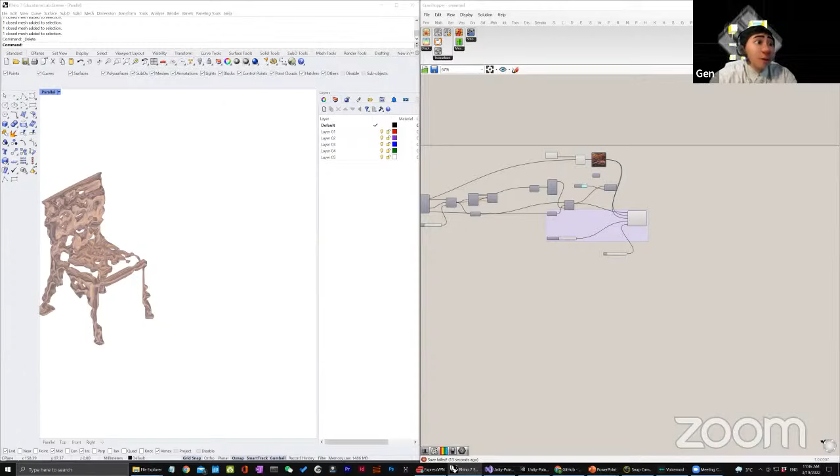For more advanced visual effects, we can look into another tool. This is the visualization that you can further export using the animator of Grasshopper. But Grasshopper Rhino is not expert in such VFX domain. If you want to create really advanced visual effects, you have to switch gears to Unity instead.

Unity somehow has a very nice personal free plan you can leverage for creating all of these visual effects. This is the Unity VFX graph, which means a lot of CG movies or games are made with it. And they also have a really user-friendly interface.

So we're gonna really quickly look at how you can visualize the output from the 3D GAN into the Unity setup.

So first of all, you have to select the correct rendering pipeline. So when you use Unity Hub to create Unity projects, select the high definition render pipeline instead. This one has the most stable version of VFX graph. If you're using universal rendering pipeline, there might be some issues for that one.